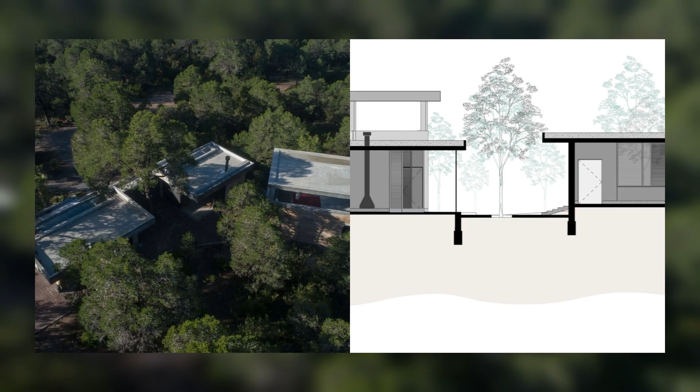The second objective was to use the topography and take into account the orientation, to provide specific views for the use of each space, and for each nucleus to have the opportunity to generate views from more than 2 sides.

At the same time, these separations were the result of preserving existing vegetation.

The core of the house is composed of 3 volumes, close to each other, containing the kitchen, the living room, and the library, with 2 new levels due to its proximity to the river and the topography, generating a flexible bar/bedroom area underneath it, and on top of it, a lookout that, due to the slope, manages to surpass the treetops to enjoy the landscape.

The rooms are separated from this central nucleus. It is through nature and pathways that one reaches them. This allows for the creation of relaxed and secluded atmospheres, taking care of their privacy and always generating curiosity.

Each room has a bathroom and terrace.

The materiality connects with the site, with the use of raw and natural materials, such as compacted earth, taken from the immediate site, and wood.

The lighting, natural and artificial, works in a zenithal way, creating atmospheres of presence and monumentality. Traveling through the ensemble creates transitions of light and shadow in which light and reflections allow the inhabitant to relate to the surroundings and situate themselves in the constructed space.

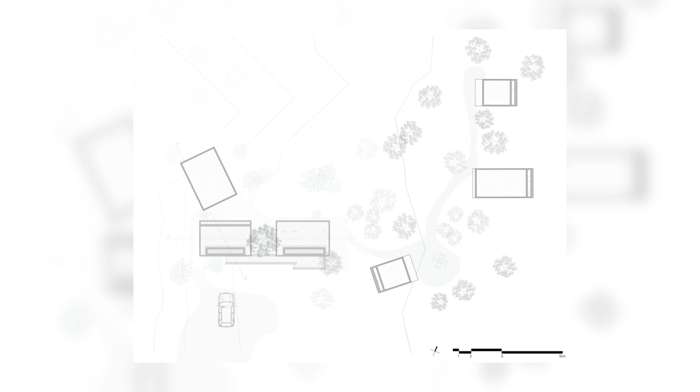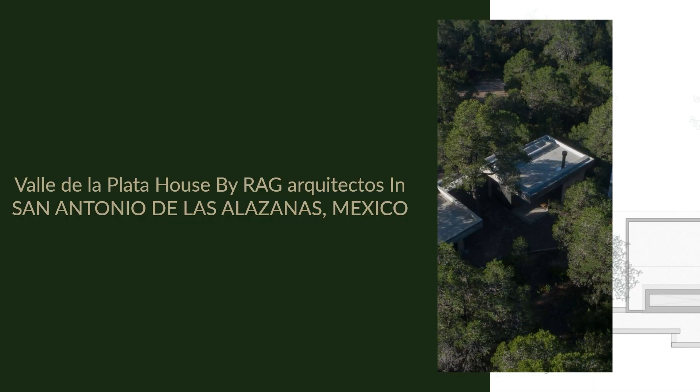The displacement and orientation of the different volumes allow the project to be naturally ventilated, promoting cross-ventilation, and in winter the fireplace allows the areas to remain warm. This reduces electricity consumption and allows it to function through solar panels and batteries.

By using these elements and gestures, such as division, hiding, discovering, moments of natural light, raw material from the site, views with direct and indirect sunlight, etc., all these elements allowed us to create a space for contemplation, introspection, rest, and curiosity.

The result is a type of temple, something that we believe should be synonymous with home.